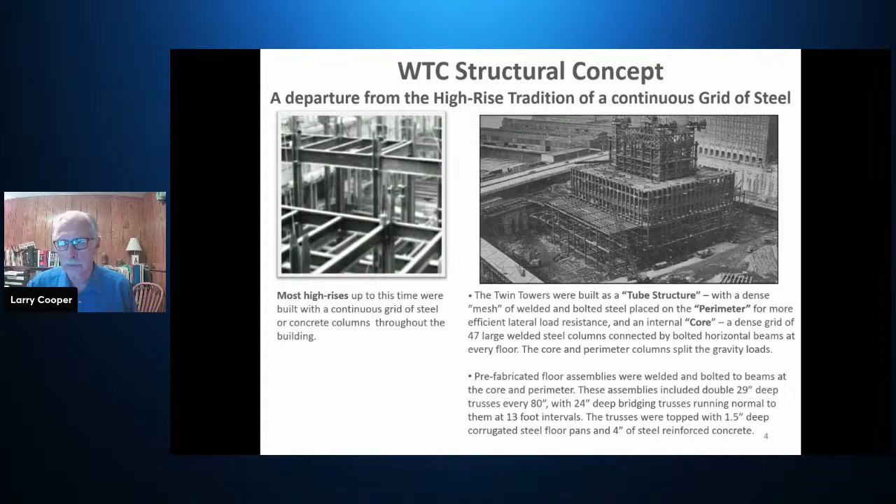These high-rise structures were designed using the tube structure system, whereby the perimeter columns resisted the lateral loads, primarily wind and seismic, and the core and perimeter columns carried gravity loads. In this floor plan, north is upward in both structures. There are 60-foot long floor trusses running in a north-south direction, spanning between the north and south sidewalls and the core area, and 36-foot floor trusses spanning between the east and west sidewalls and the core area.

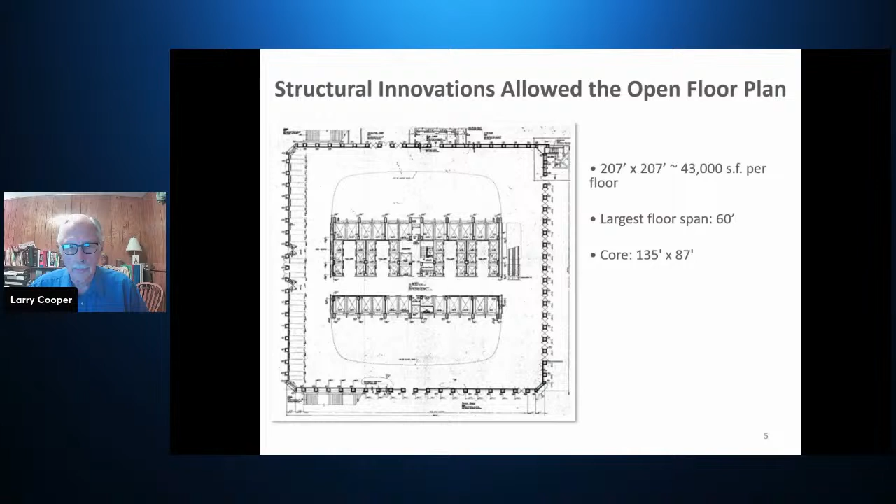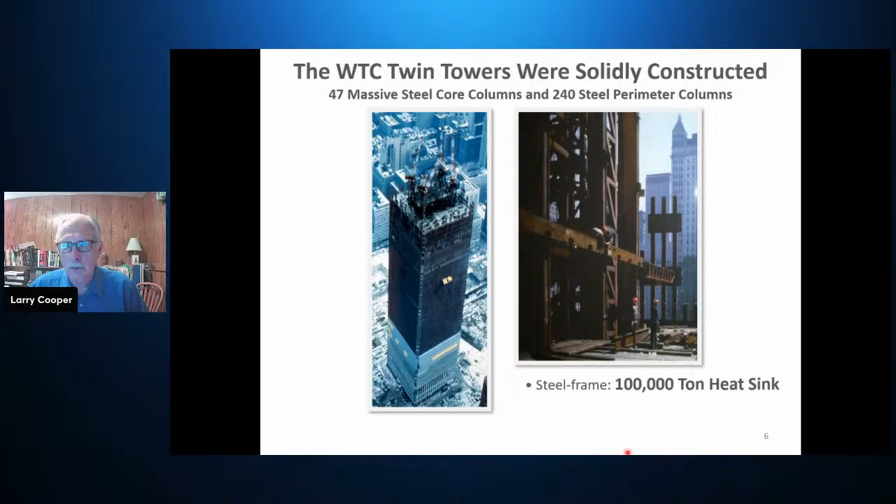The picture on the right shows the core columns, and on the left, the three perimeter columns. The spandrel beams and floor trusses run across the picture. This was a picture taken during construction.

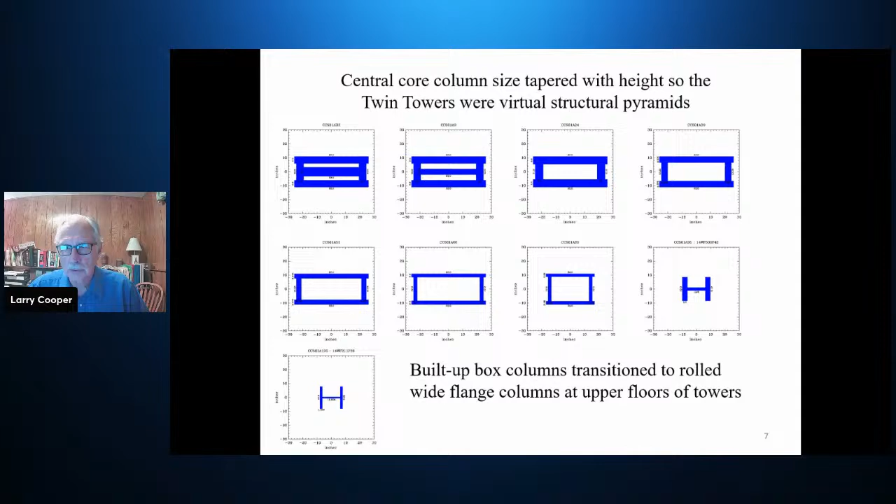The column cross-sections in the interior core varied from massive multi-plate sections in the lower levels to 14-inch wide-flange sections in the upper levels. 12 different grades of steel were used between the lower and upper levels of the interior and exterior columns.

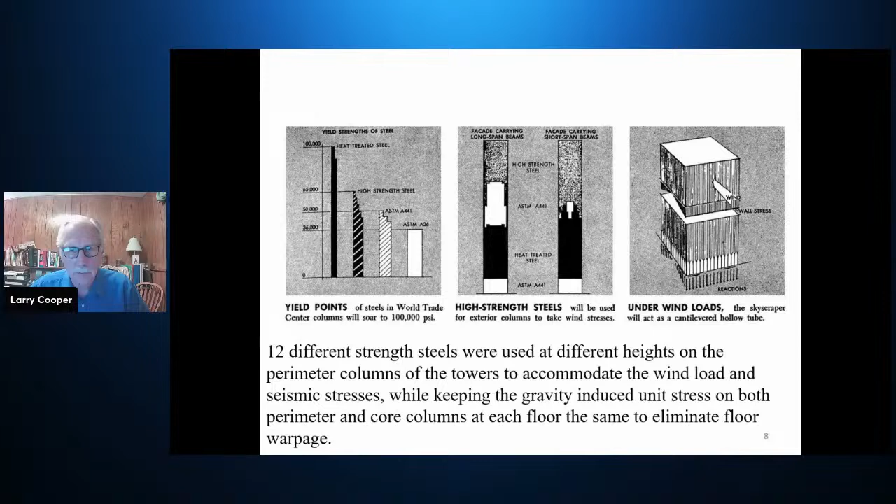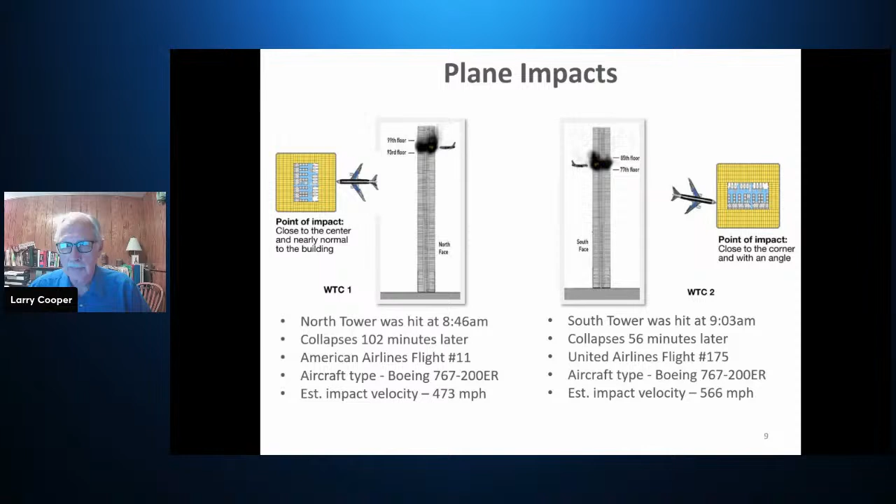The first plane hit the north face of Building 1 near the 95th floor at 8:46 a.m., and the building collapsed 1 hour and 42 minutes later. The second plane hit the south face of Building 2 at 9:03 above the 77th floor, and the building collapsed 56 minutes later.

This is an elevation view of the plane hitting the North Tower. The greatest impact on the building came from the fuselage and the engines, engines being represented here by these yellow circles, and of course that being the fuselage area.

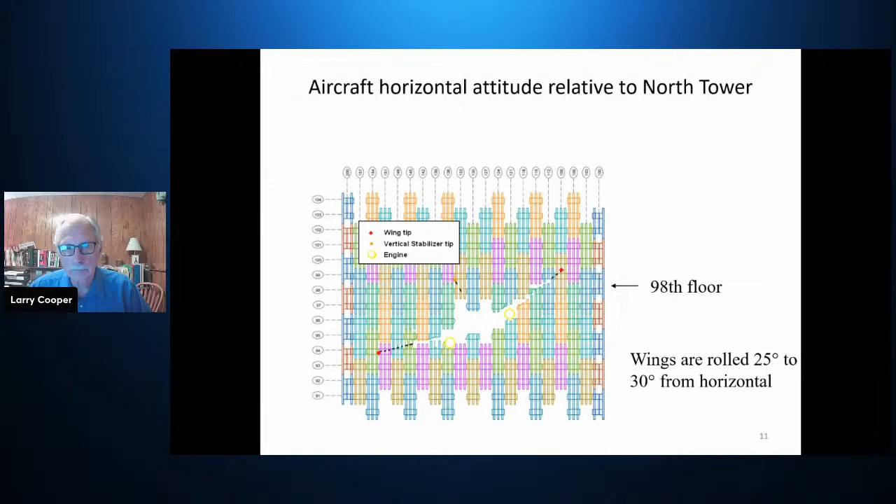Now, listen to what a FEMA structural engineer had to say 15 years before 9/11 about how much damage a 300-ton aircraft flying into a building designed to resist 13,000 tons of wind load could do.

The fact that they were designed to resist over 13,000 tons of wind pressure meant that they could not be knocked over. In a remarkably prescient interview given over 15 years ago, Charlie Thornton, now one of the investigators, considered the scenario: Well, 13,000 tons is a lot of force. People always talk about an airplane crashing into a building.

And in 1944 or 45, a plane did crash into the Empire State Building. But the largest aircraft flying today, at least commercially, the 747, fully loaded, is on the order of 300 tons. So if you think about a 300-ton element crashing into a building that's been designed to carry 13,000 tons, you can see that an aircraft crashing into the World Trade Center would probably not do anything to the major building. It could affect localized structural elements, could knock out a column, and there could be some damage. But as far as a plane knocking a building over of that type, that would not happen.

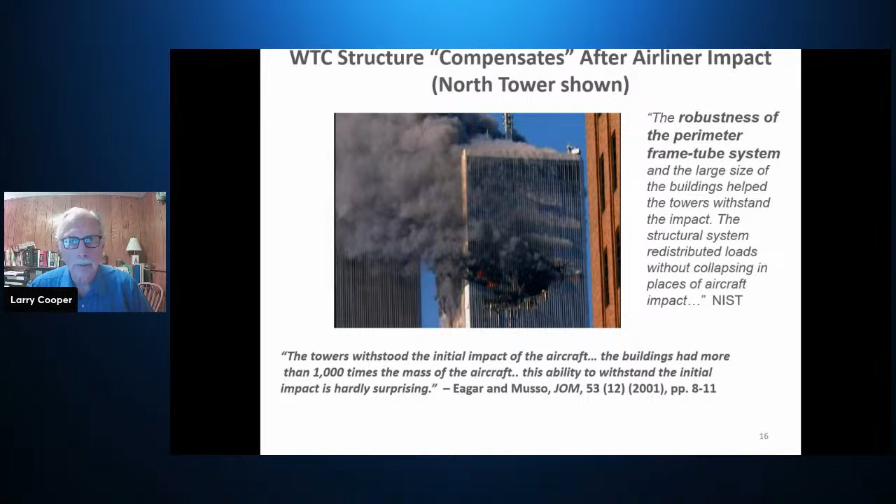Now listen to NIST's explanation of how the structural loads got distributed around the damaged columns: what happened was that the loads that were being carried by those columns arched across the opening.

The aircraft impact analysis showed that the wings were shredded before they hit the central core.

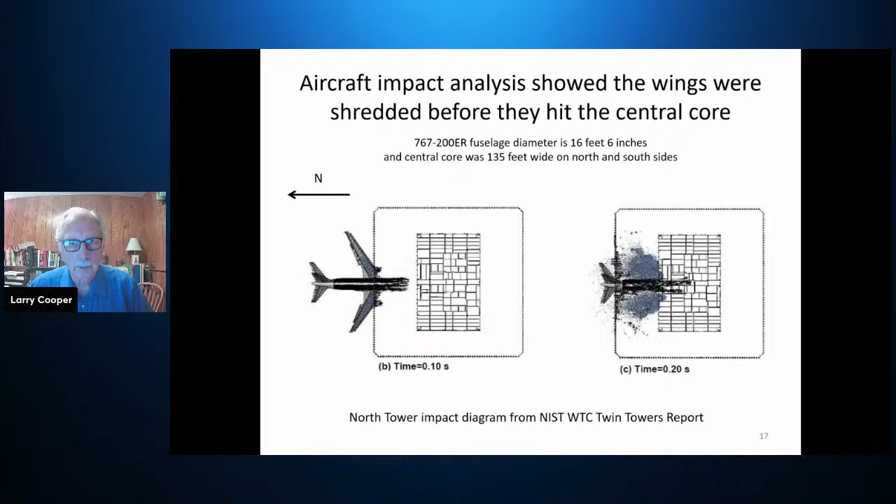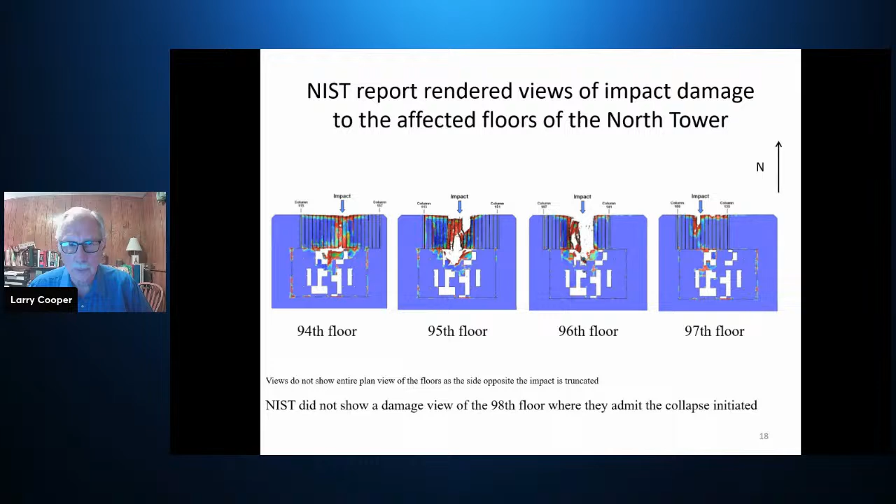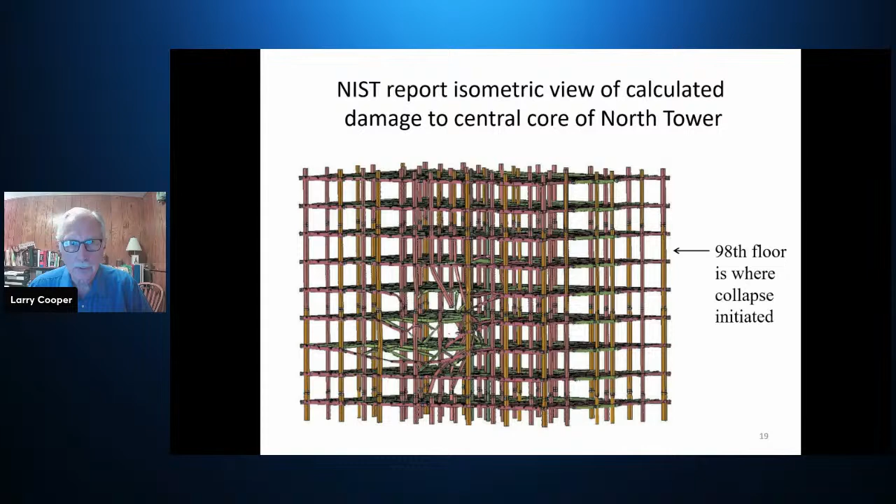The NIST report rendered views of impact damage to the affected floors of the North Tower, with the 95th and 96th floors being most severely impacted. NIST did not show a damage view of the 98th floor, where they admit the collapse initiated. In the NIST report, they had an isometric view of calculated damage to the central core of the North Tower.

FEMA estimated the dispersion of the jet fuel on floors 92 through 99 and concluded that the resulting fires had an insignificant impact on the structural system.

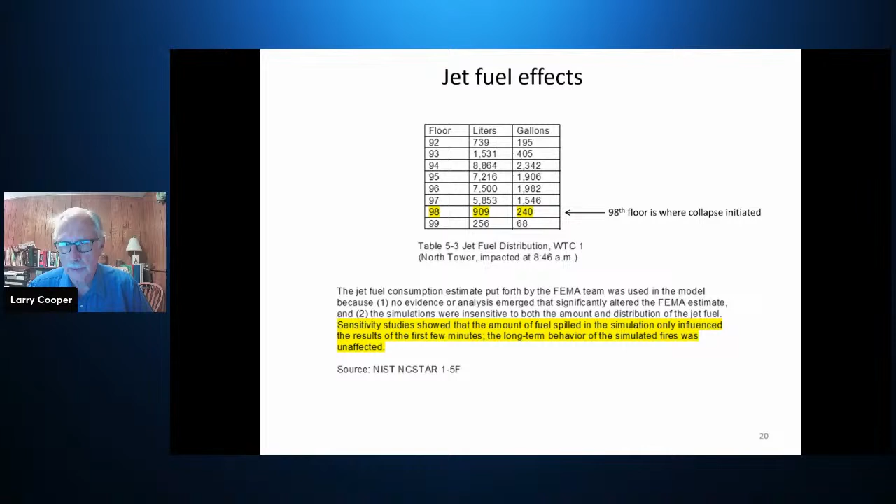Now let's review why aircraft impact and jet fuel would not have caused collapse. Wings would not have made it to the central core. Most of the fuel was aerosolized on impact, with much of it remaining outside the building. The fuel which did enter the building burned up within minutes. The redundant steel frame redistributes loads.

The factor of safety against vertical collapse for the perimeter columns was 5 to 1, and for the core columns was 3 to 1. This is far too high for the impact damage to approximately 20% of the columns to have caused collapse.

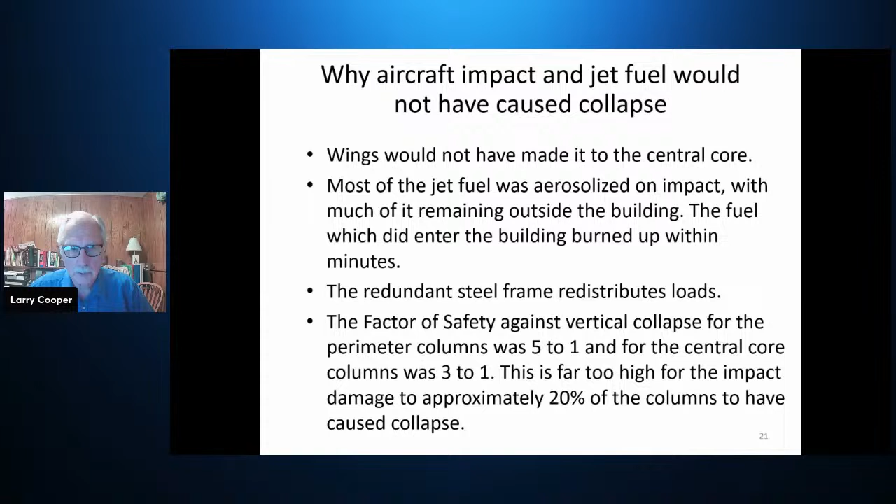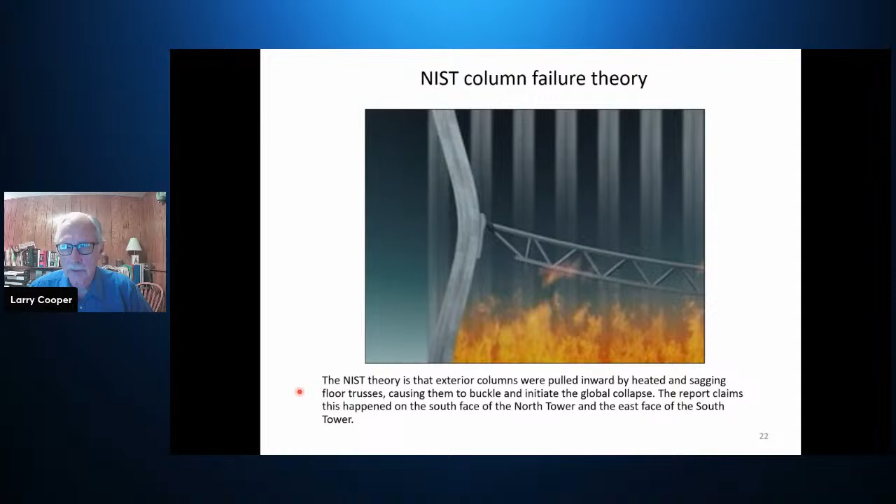As we will see later, NIST ignored the documented evidence that the interior core columns began collapsing before the exterior columns. But instead of starting with that sequence, NIST based its analysis on the assumption that the floor trusses sagged enough to pull on the wall columns. They subjected a truss model to exceptionally high temperatures in an attempt to attribute the inward movement of the columns to sagging, overheated floor trusses.

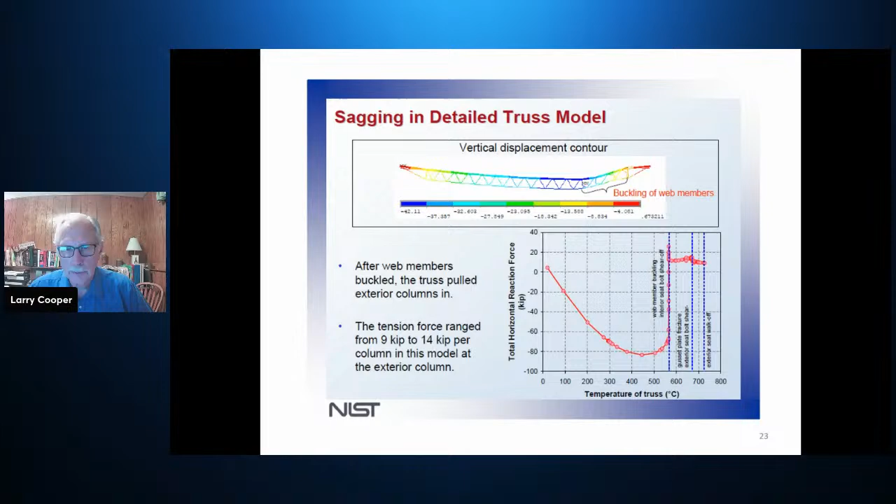The NIST model could not produce an inward force from sagging floor trusses which would pull the columns inward. This is the 60-foot floor trusses depicted here, and the 36-footers on the short end.

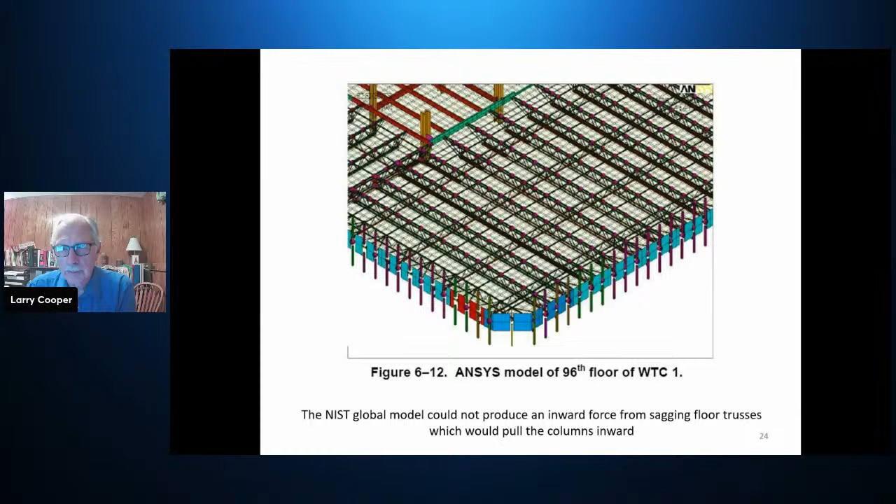So where did NIST find the additional lateral load needed to create the necessary lateral forces on the columns? To produce the inward bowing of the columns, an artificial 5,000-pound lateral load was applied at each truss-to-column connection at each story in the impact zone.

If you did this on your SE or PE exam, do you think you would have been certified?

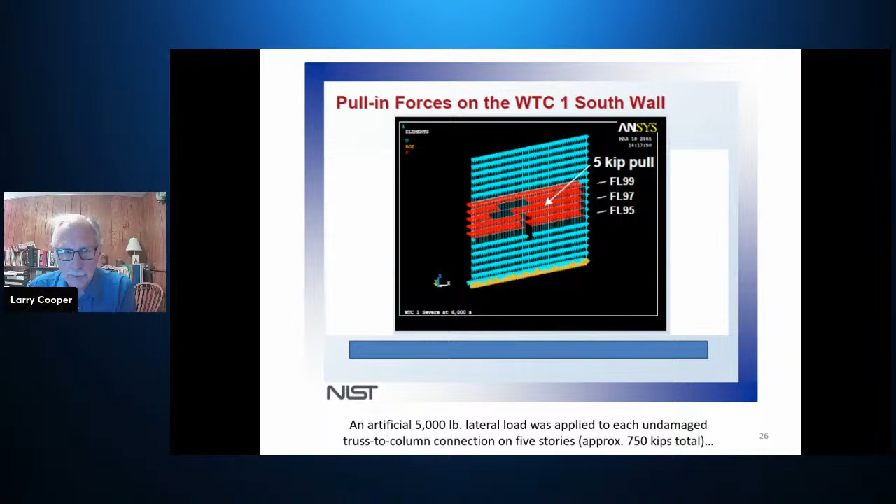NIST further emphasized the artificial forces with this diagram, without any supporting evidence. Using the forces just described, NIST produced this displacement pattern in the south face of Building 1.

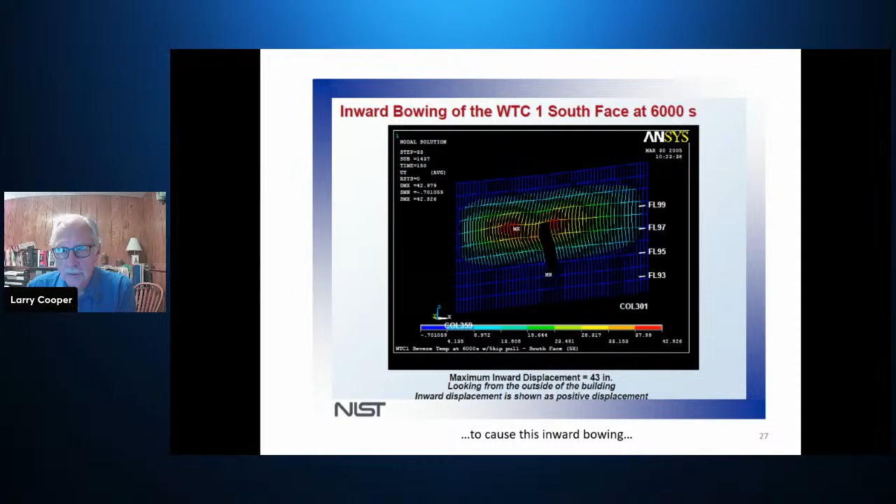Here's the NIST report explanation for collapse initiation and propagation of the North Tower. With the continually increasing bowing as more columns buckled, the entire width of the south wall buckled. Instability started at the center of the south wall and rapidly progressed horizontally toward the sides. As a result of the buckling of the south wall...

The south wall significantly unloaded, redistributing its load to the softened core through the hat truss and to the east and west walls through the spandrels. Two minutes before the collapse, the north, east, and west walls of floor 98 carried about 7%, 35%, and 30% more gravity loads than they did right after the impact, and the south wall carried about 25% and the core 20% less loads.

The section above the impact zone tilted to the south as column instability progressed rapidly from the south wall to the east and west walls, resulting in increased gravity load on the core columns. The release of potential energy due to downward movement of the building mass above the buckled columns exceeded the strain energy that could be absorbed by the structure. Global collapse ensued. That's NIST's statement.

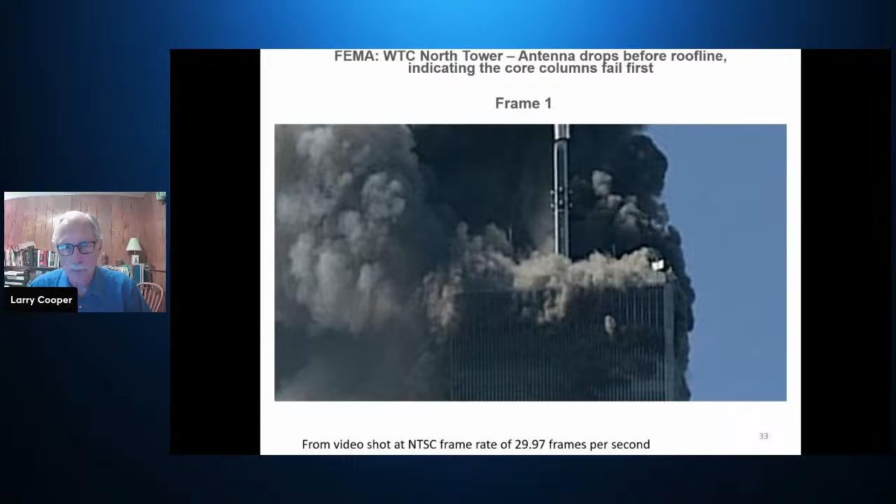When the collapse finally starts, the antenna started just a little bit before the exterior of the building started, and that tells us that the core columns let go first. Now watch frame by frame as the antenna begins dropping before the building walls begin dropping. One, two.

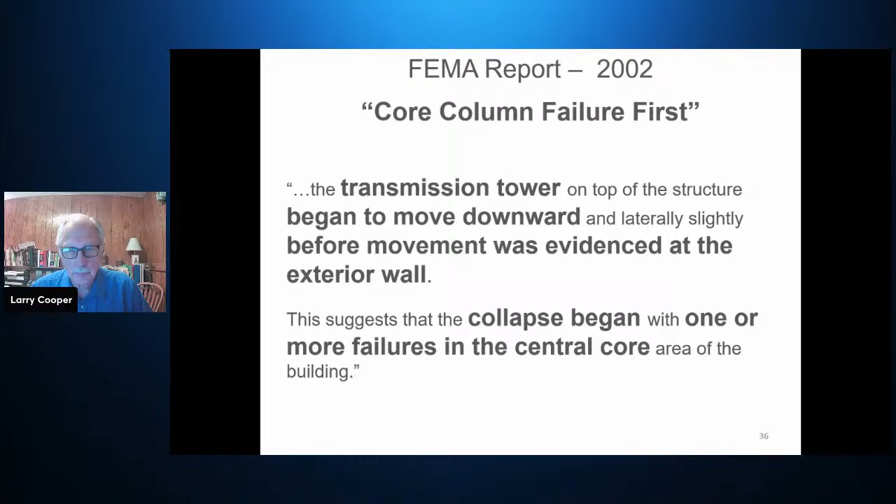So the core column failure occurred first. This comes from FEMA in 2002: the transmission tower on top of the structure began to move downward and laterally slightly before movement was evidenced at the exterior wall. This suggests that the collapse began with one or more failures in the central core area of the building.

The hat truss supported the antenna on the North Tower, and the core columns supported the hat truss. The hat truss served to transfer vertical, horizontal, and lateral loads between the perimeter columns and the core columns.

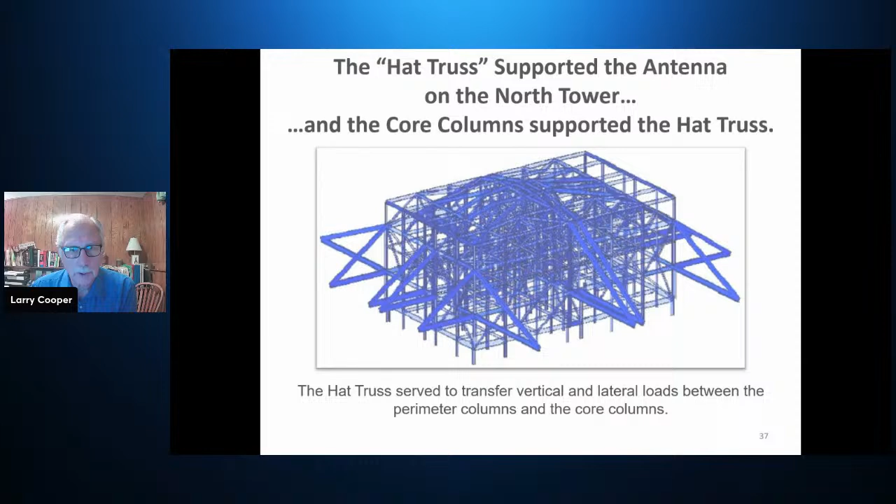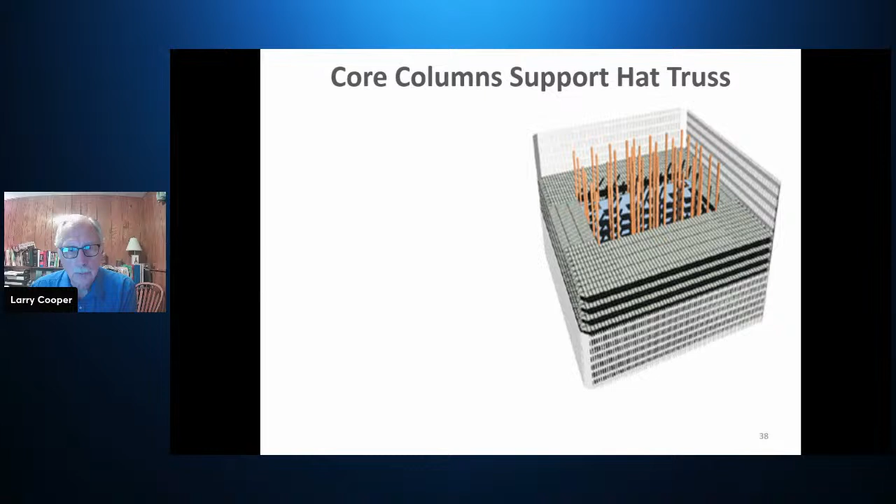The core columns shown here in brown were supporting the hat truss. So what both the video evidence and the FEMA analysis indicate is that first the core columns fail, then the hat truss and antenna descend before the perimeter columns, then the core columns pull on the floor trusses. Finally, the floor trusses pull in the perimeter columns, initiating complete collapse.

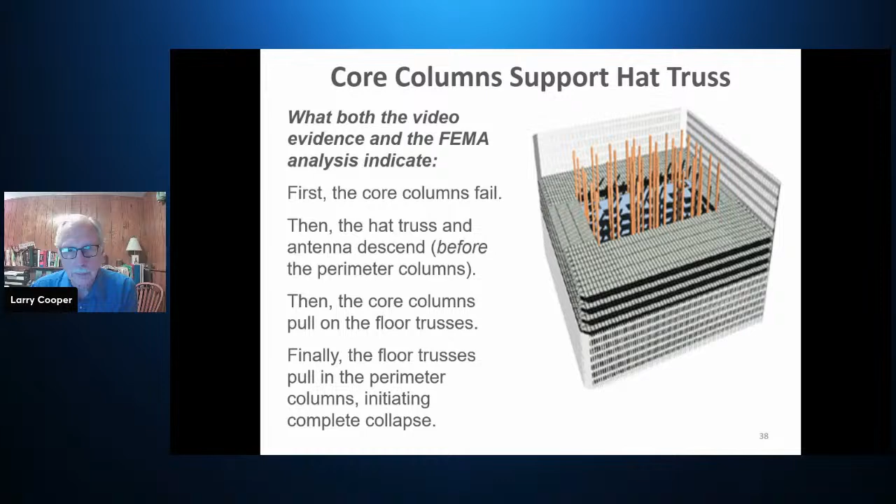In this next video, watch closely at the east wall, the wall on the left side of this video. Notice the walls being pulled in. See it a couple of times, okay?

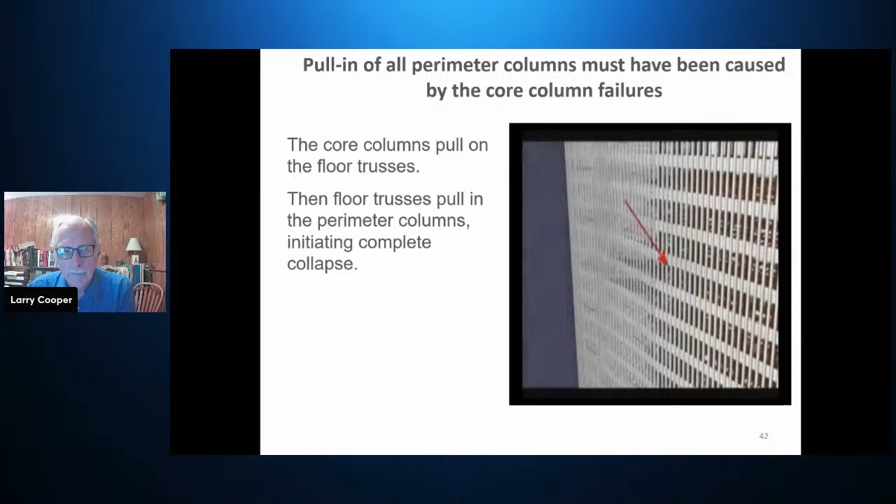So how did the progressive collapse theory get started and perpetuated thereafter? Civil engineering professor Bazant submitted the progressive collapse theory to the ASCE on September 13th of 2001, just 2 days after the attack. The ASCE published the theory in the article titled 'Why Did the World Trade Center Collapse? Simple Analysis' by Bazant and Zhou in the Journal of Engineering Mechanics in January of 2002.

Bazant claimed a large dynamic load would have occurred, caused by what he termed a powerful jolt, and that it would overcome the reserve strength of the columns below.

After various questions were raised about the theory, Bazant and Le defended it in the article titled 'What Did and Did Not Cause Collapse of World Trade Center Towers in New York,' published in the journal in 2008.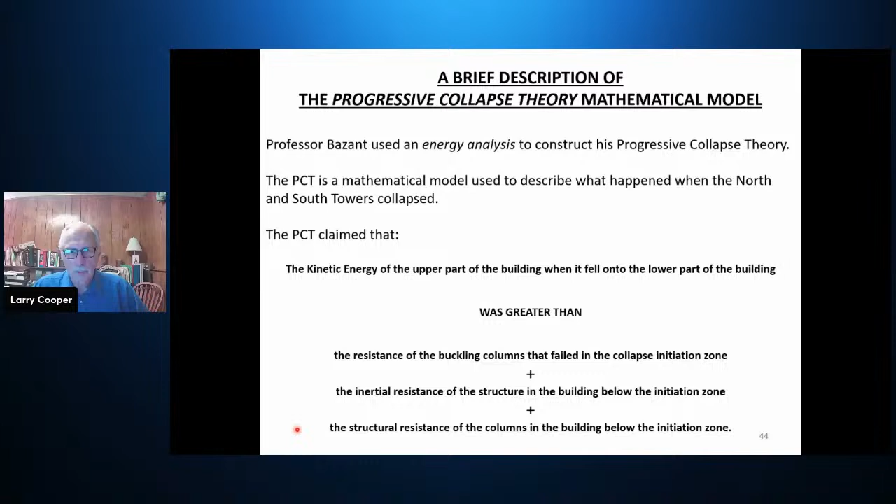So in the mathematical model, he's saying E1 exceeded the sum of those, where E1 is the kinetic energy of the falling upper part of the building, 2 is the sum of resistance to buckling of columns in the initiation zone, 3 is the conservation of momentum of the upper story of the lower part being hit by the falling upper part, and 4 is the sum of resistance to collapse of columns in the lower part.

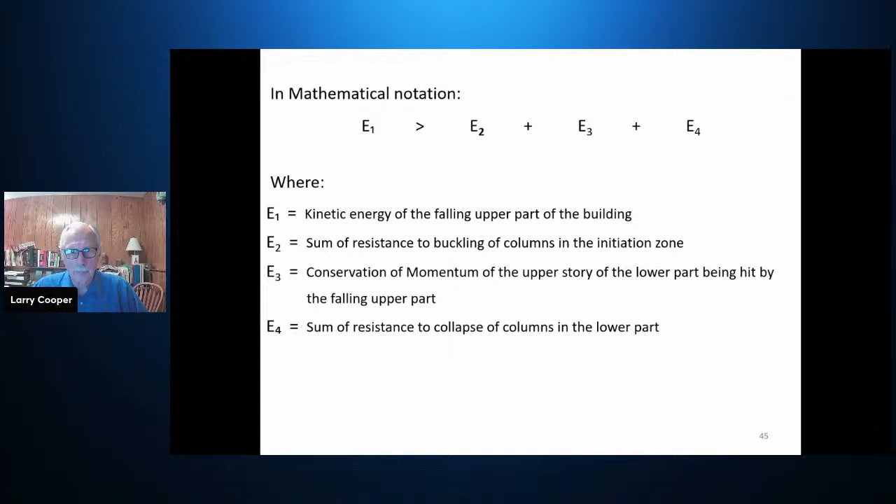There's a bit of a problem. Bazant's progressive collapse theory violates Newton's third law of motion.

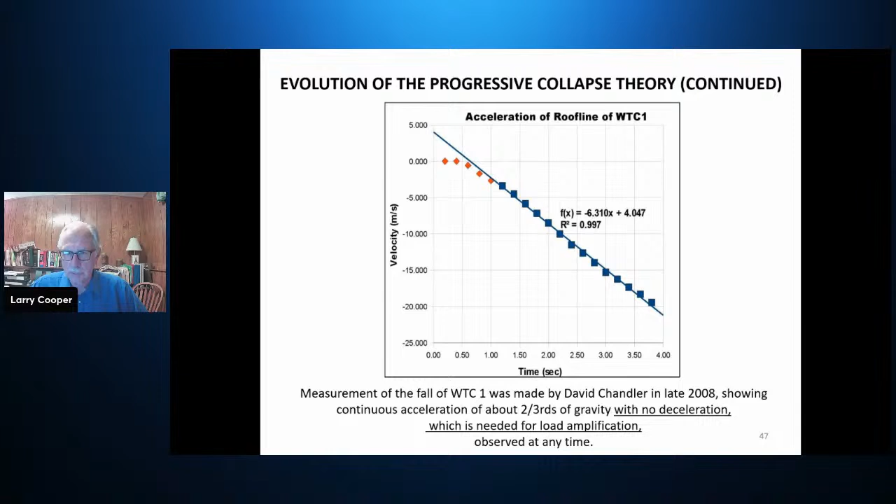In 2008, David Chandler, a high school physics teacher, measured the Building 1 roofline acceleration, showing that there was no significant change in acceleration of the collapsing roofline, thereby indicating that the falling upper section did not encounter any change in resistance as it encountered the lower building structure.

So, continuing with the evolution of the progressive collapse theory, MacQueen and Szamboti published an article titled 'The Missing Jolt, a Simple Refutation of the NIST-Bazant Collapse Hypothesis,' on the website of the Journal of 9/11 Studies in 2009.

David Chandler published an article titled 'Destruction of the World Trade Center North Tower and Fundamental Physics' on that website in 2010. Bazant and Le defended the theory again in a paper titled 'Why the Observed Motion History of the World Trade Center Towers is Smooth,' published in the Journal of Engineering Mechanics in January of 2011.

Szamboti and Johns submitted a discussion paper in May of 2011 to the JME, pointing out errors in the Bazant and Le paper titled 'Why the Observed Motion History of the World Trade Center Towers is Smooth.'

One year later, in May of 2012, Szamboti and Johns were notified by the JME that their discussion paper was rejected on the basis of just one reviewer's comments.

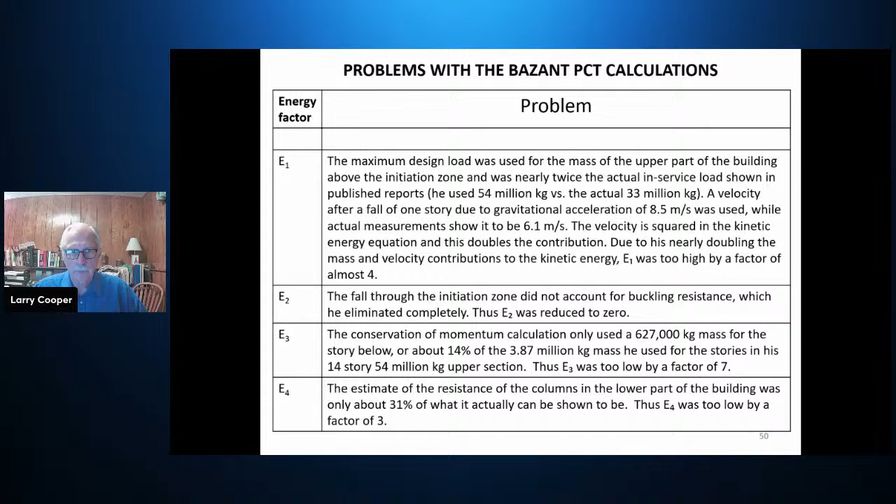So after correcting these miscalculations, we have to conclude that E1 is far less than the sum of E2, E3, and E4, and progressive collapse will not occur.

The actual falling energy versus the energy absorbing capacity of the resisting elements is graphically represented here.

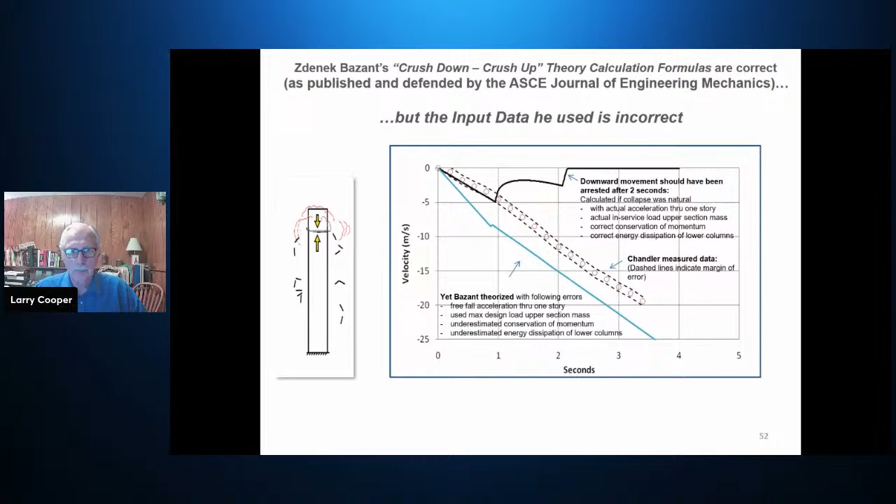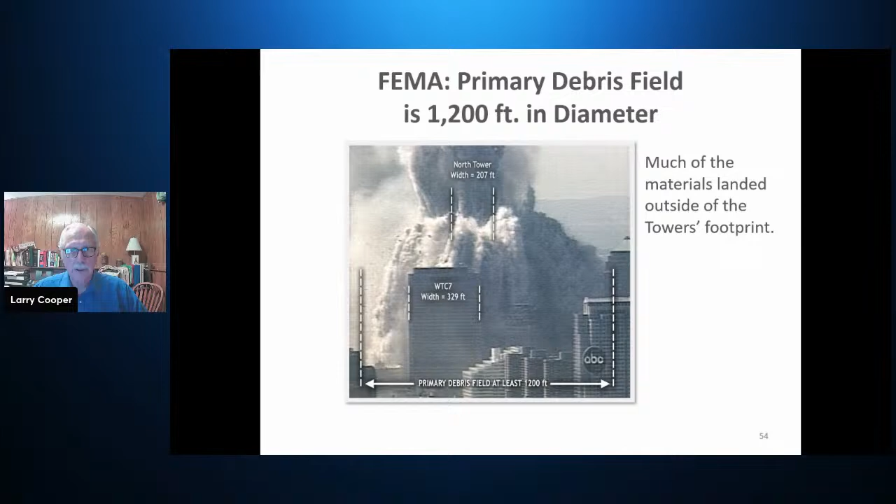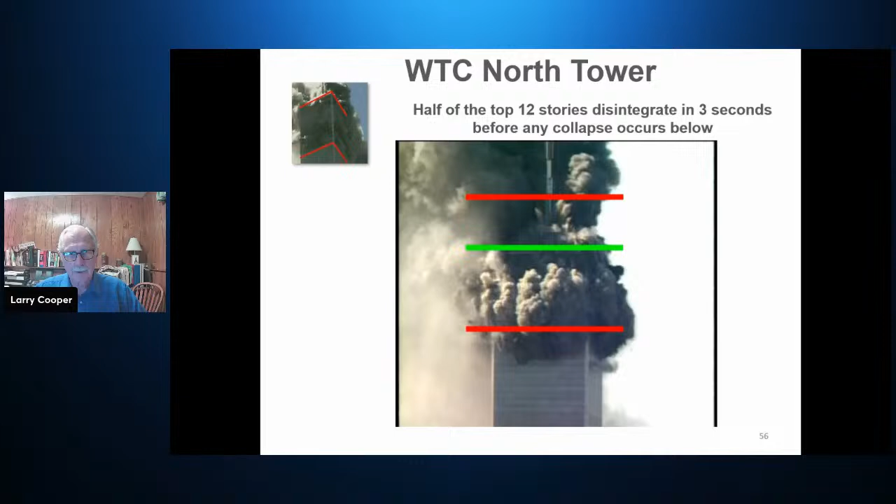So how can the gravitational collapse of 12 stories of a steel-framed building, with the entire framing system bolted together, turn most of those stories into dust and propel building components laterally hundreds of feet? Much of the material landed outside the building's footprint. Watch as most of the top 12 stories appear to encounter no resistance and fall freely into the lower structure. It just kind of vanishes.

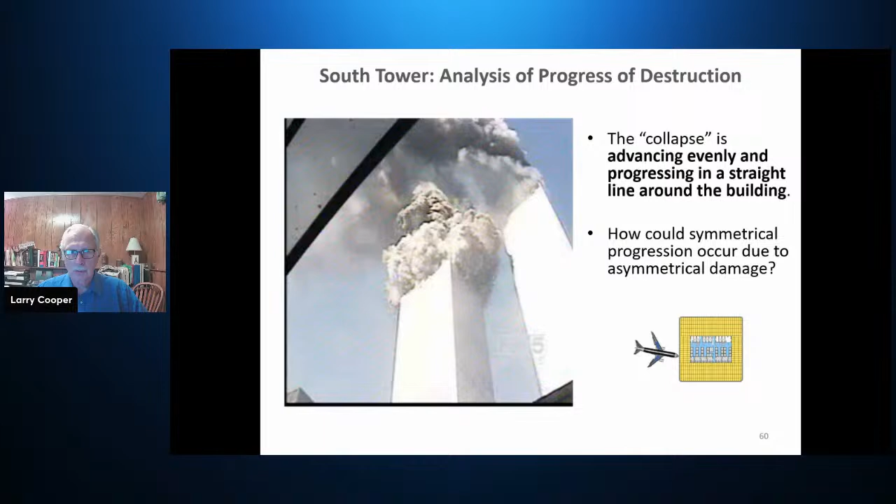Now let's look at the South Tower collapse symmetry anomalies. Here is the South Tower at the onset of collapse. The collapse is advancing evenly and progressing in a straight line around the building. So how could a symmetrical progression occur due to asymmetrical damage?

Other high-rise fires have occurred over the decades, and here's a brief look at three steel-framed high-rise buildings subjected to intense fires but did not collapse.

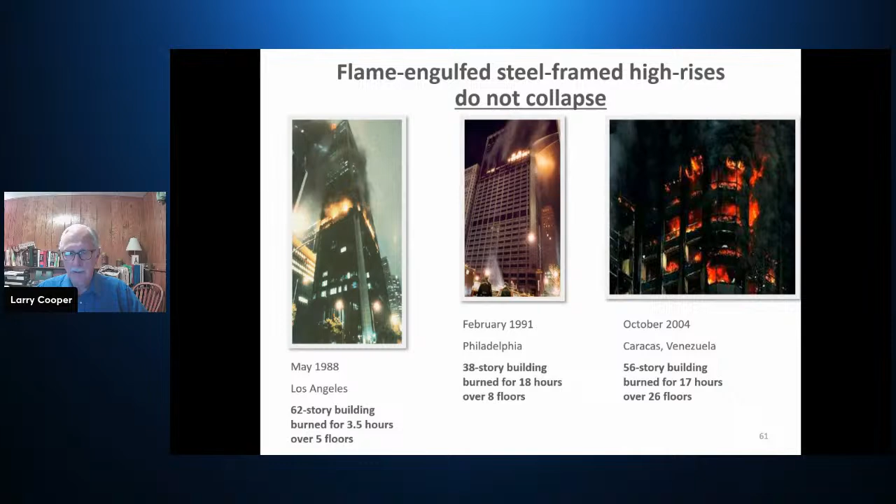Here's a few comments on the destruction of the evidence. Bill Manning, editor-in-chief of Fire Engineering magazine, demands a stop to destruction of evidence. The structural steel from the World Trade Center has been and continues to be cut up and sold for scrap. Such destruction of evidence shows the astounding ignorance of government officials to the value of a thorough scientific investigation.

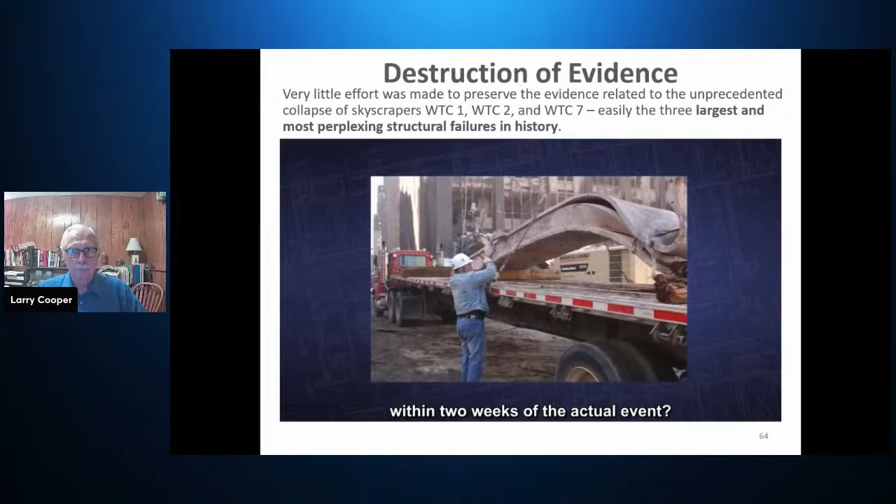Now listen to Dr. Corley being questioned by a congressman. 'When did you become aware that the steel from the World Trade Center was being sold off?' 'I think it was on the order of a week or so before we arrived on site, on October the 5th, I believe.' 'So in other words, the city was selling or disposing of the material within 2 weeks of the actual event?' 'I believe I was the first one to find out the steel was being recycled. New York Times reporter Jim Glanz told me 2 weeks after the collapse, and I tried to contact the city, and also New York Times reporters tried to make sure we could have access to the steel to do research. It was not happening.'

I just think there's so much that has been lost in these last 6 months that we can never go back and retrieve. And it's not only unfortunate, it's borderline criminal. 400 truckloads per day of material were taken away from the World Trade Center site and sent to China for recycling. There were laws violated in the destruction of that evidence. For the American Society of Civil Engineers to ignore those events is extremely disturbing and is a violation, in my opinion, of their professional code of ethics.

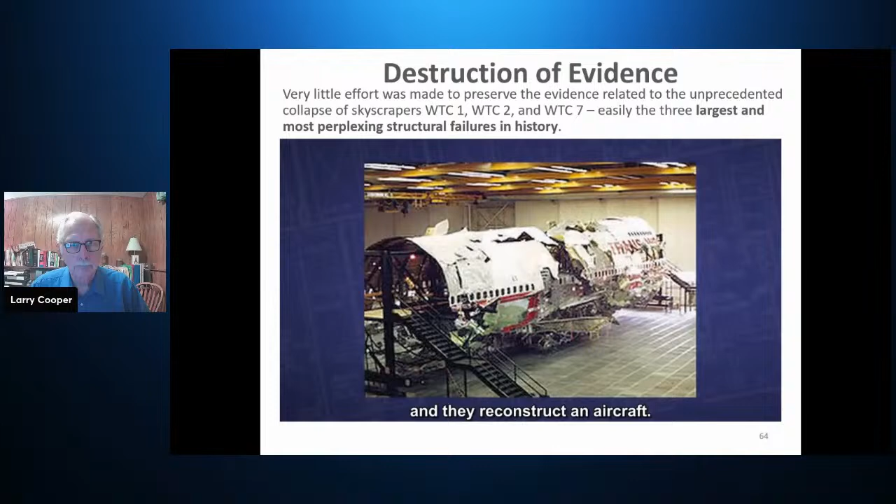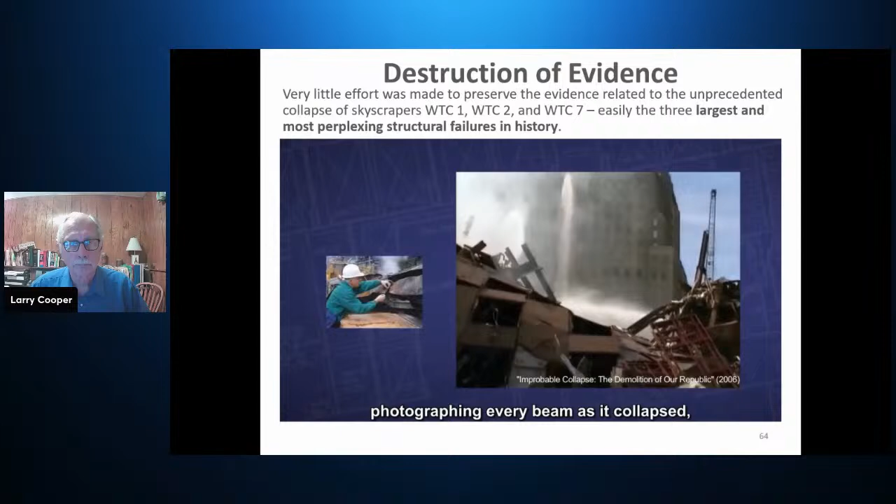It was contrary to the way all investigations are done. If an airplane crashes, they seal off the entire area and nobody touches anything. They move it to a secure location and reconstruct the aircraft. Normally, when you have a structural failure, you carefully go through the debris field, looking at each item, photographing every beam as it collapsed and every column where it is in the ground, and you pick them up very carefully and look at each element.

We were unable to do that in the case of Tower 7. You can't do science when you are deprived of the evidence and when your hypothesis is the least valid instead of the most likely. And the most likely hypothesis in the case of Building 7 wasn't even mentioned. This is not science. It's trying to prove preconceived ideas.

John Gross of NIST was in the salvage yards deciding what materials to save for further analysis. NIST only saved between 0.25% and 0.5% of the steel from the Twin Towers, and only one small piece from Building 7. Out of the steel NIST did save, testing showed only 3 pieces had experienced temperatures above 250 degrees centigrade, and none above 600 degrees centigrade.

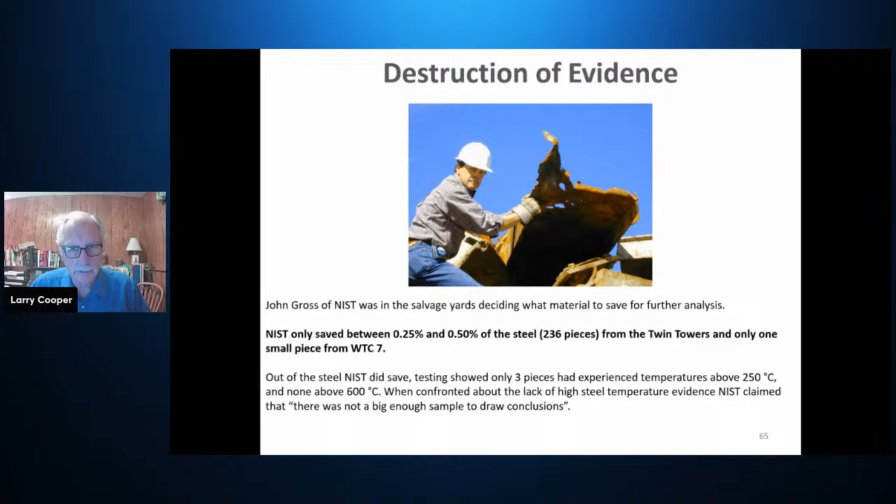When confronted about the lack of high steel temperature evidence, NIST claimed that there was not a big enough sample to draw conclusions.

The hotspots in the World Trade Center rubble corroborate reports of deep down molten metal. This USGS aerial photo, taken on September 16, just 5 days after the event, shows surface temperatures as high as 1,377 degrees. The official reports by NIST, FEMA, and the 9/11 Commission, however, omit any mention of the large quantities of molten metal observed in the basement areas of the Twin Towers and Building 7.

So let's review a summary of the problems with the NIST report. First, the claim that the upper part of the towers crushed the lower part of the towers violates the law of conservation of momentum and the law that for every action between bodies there is an equal and opposite reaction, as shown by the measured, smooth, uninterrupted descent of the upper portion of the North Tower.

NIST claims that the floor trusses in the aircraft impact zone pushed outward on the perimeter columns with a force of about 80 kips before starting to sag and pull the columns inward to cause the buildings to collapse. Yet there is no evidence to support this claim. Extensive photos and videos of the towers show no outward bowing of the perimeter columns at any time during the fires before the collapse.